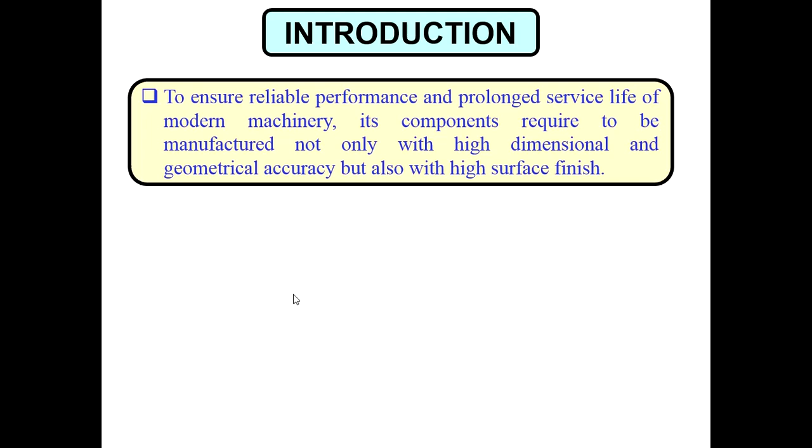In normal machining operation, no doubt dimensional accuracy of the component is important, but along with that geometrical accuracy and high surface finish is also important. This high surface finish along with dimensional and geometrical accuracy ensures the prolonged service life for the component and reliable performance. Premature failure of the component in service life will be avoided if you have good surface finish for the component.

This surface finish plays a very important role to improve properties such as wear resistance, fatigue strength, corrosion resistance, and power loss due to friction. All these enhance the service life of the component. These are very important properties when the component is actually working.

We have some methods like turning, milling. These methods are not able to meet the requirement of surface finish as per the application. Even grinding, which is considered one of the finishing operations, is not applicable for delicate workpieces for finishing due to the large number of cutting forces generated in grinding.

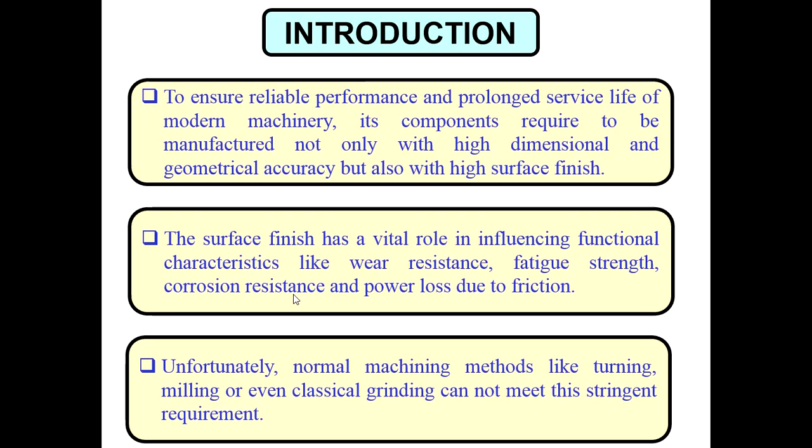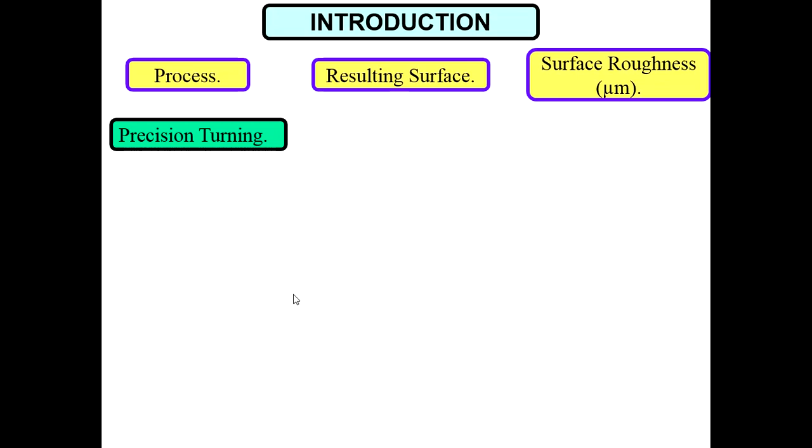Let's compare some finishing processes, the surface resulted from that, and the roughness value obtained. Roughness value is the measure of surface finish, measured with the help of a surface roughness tester. In precision turning operation, which is also considered a finishing operation in industry, we get a roughness value between 1.25 to 12.5 micrometer.

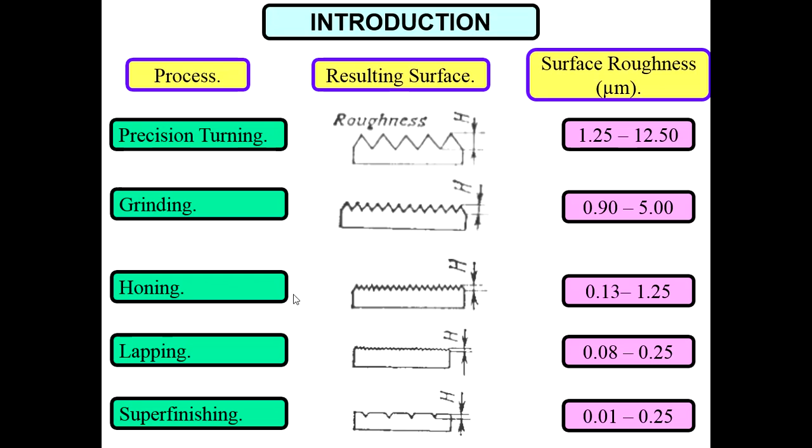In grinding we get roughness value between 0.9 to 5 micrometer. In honing, a finishing operation, we get roughness value from 0.13 to 1.25 micrometer. In lapping we get roughness value between 0.08 to 0.25 micrometer. Super finishing is a modification of the honing process, and it gives a roughness value between 0.01 to 0.25 micrometer.

Now let's consider lapping. Lapping is regarded as one of the oldest methods of obtaining a fine finish on the workpiece. It is basically an abrasive process in which loose abrasives function as cutting points, finding momentary support from the lap. These loose abrasives are used between the lap and the workpiece, with a vehicle material, some liquid material, used to carry these abrasive particles between the workpiece and the lap.

This lap is made from soft material. The relative motion between the lap and the workpiece should change continuously so that the path of the abrasive grains of the lap is not repeated on the workpiece. This scheme of the lapping process shows how lapping is done. Pressure is applied from the top, either manually or by machine, and the lap is moving so that the same abrasive grains are not in contact with the workpiece again and again.

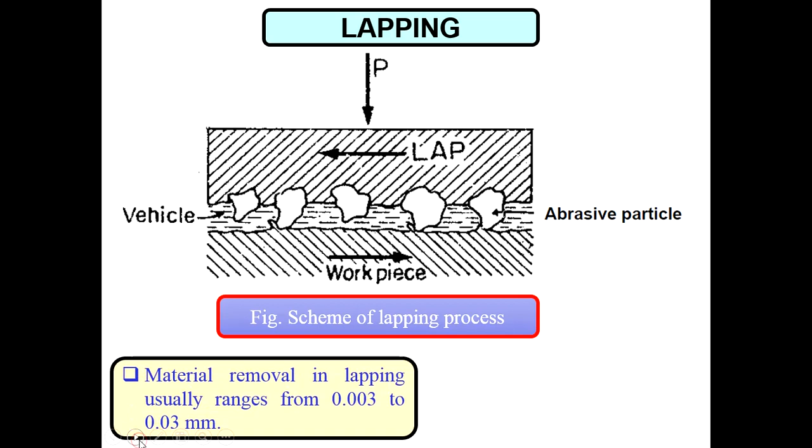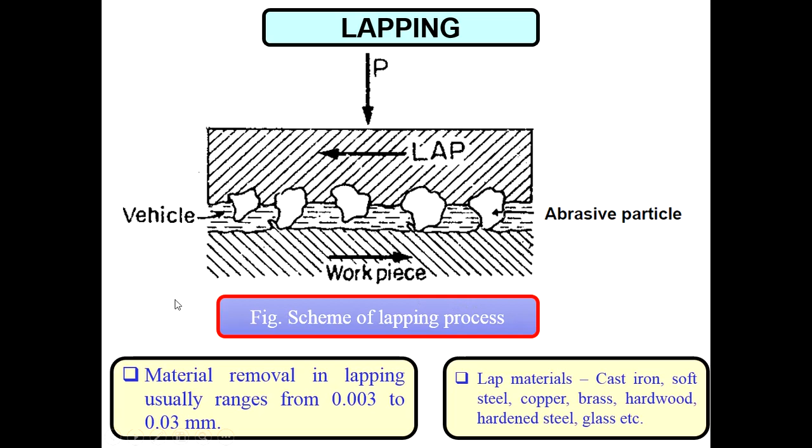Material removal in lapping is very small, 0.003 to 0.03 mm. We use some soft materials for manufacturing the lap, such as cast iron, soft steel, copper, brass, and some hardwood. Hardened steel and glass are also used as lap material for manufacturing the lap.

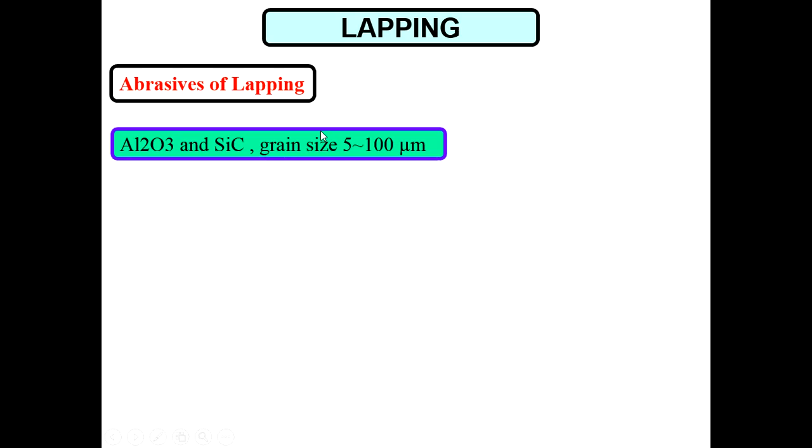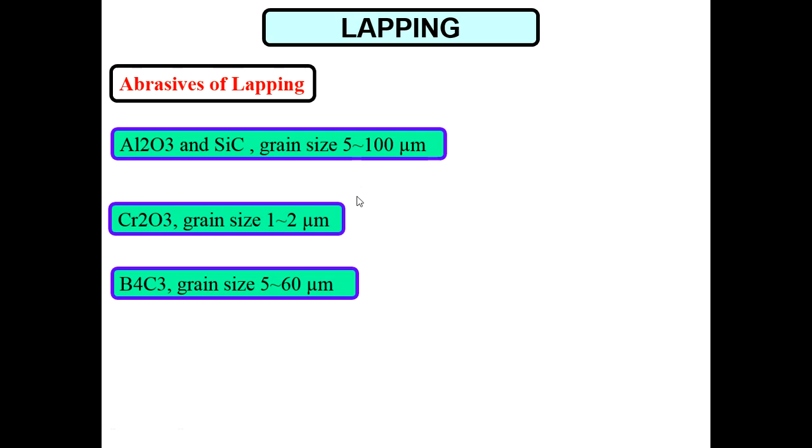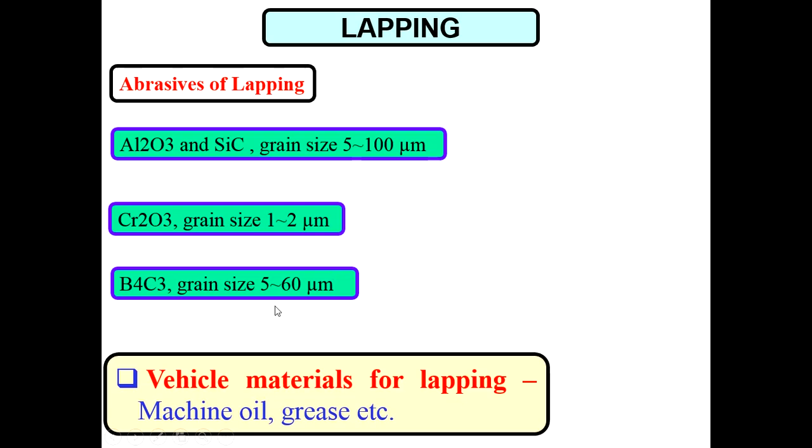Some abrasives used for lapping are aluminum oxide and silicon carbide, with grain size between 5 to 100 micrometer; chromium oxide, grain size between 1 to 2 micrometer; and boron carbide, grain size between 5 to 60 micrometer. The vehicle materials for lapping are machine oil and grease, which carry these abrasive particles between the lap and the workpiece.

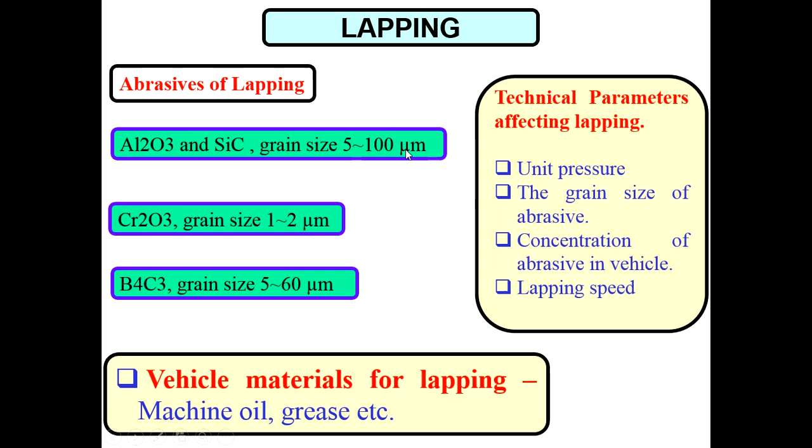These are some technical parameters in lapping: the pressure applied on the lap, and the grain size of the abrasive, which plays an important role in what grain size you are selecting. Then the concentration of abrasive in the vehicle, how much abrasive is present, also plays an important role. Then lapping speed, the speed at which you are moving the lap over the workpiece or the workpiece is moved relative to the lap, is also an important technical parameter in the lapping process.

Now we have two types of lapping: first is hand lapping and second is machine lapping. Hand lapping is done with abrasive powder as the lapping medium, whereas machine lapping is done with either abrasive powder or with a bonded abrasive wheel, considered as a lapping wheel. Both are used in machine lapping, either loose abrasive powder or bonded lapping wheel.

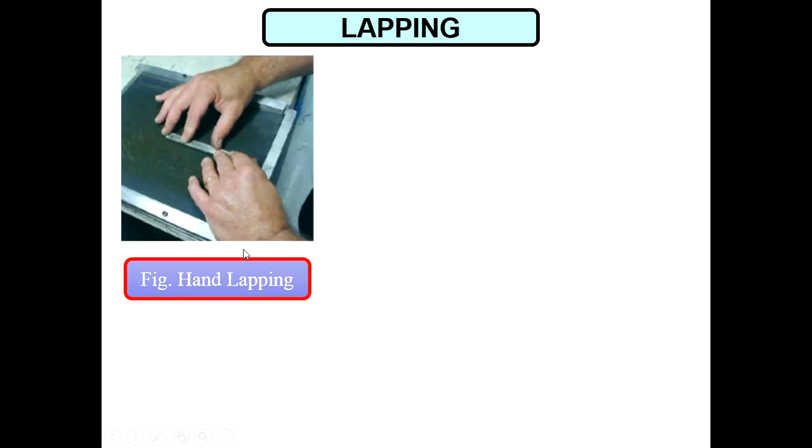The hand lapping of a flat surface is carried out by rubbing the component over some accurately finished flat surface of a master lap, usually made up of a cast iron block. Manual lapping requires high precision skill because the lapping pressure and speed should be controlled manually, requiring a skilled operator. The vehicle material is spread over the lap, and the material to be lapped is moved manually over the lap. The speed and pressure are both controlled manually, requiring a skilled operator for hand lapping.

And then we have some machine lapping also.

Machine lapping is an economic way of lapping for batch quantities only. If you have to lap for one or two components, this may not be economical, but for batch quantities, we can prefer machine lapping.

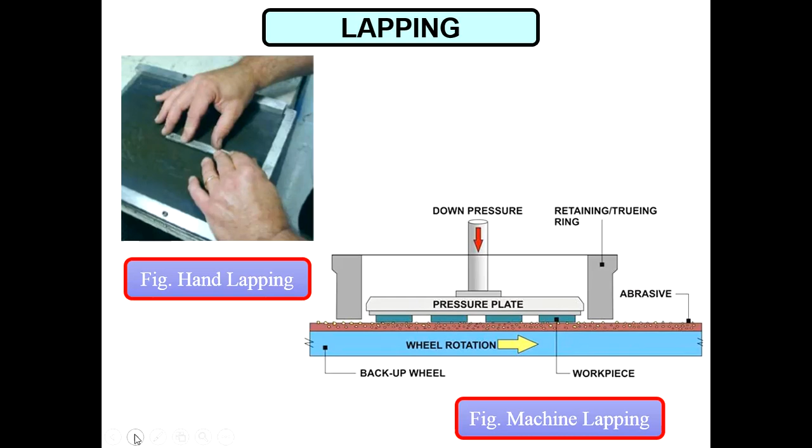This machine lapping uses laps as well as abrasive powder, which are held in a suitable vehicle medium for lapping. Machine lapping is also a very popular method nowadays in industry to achieve the required surface finish on the workpiece. Then we have honing.

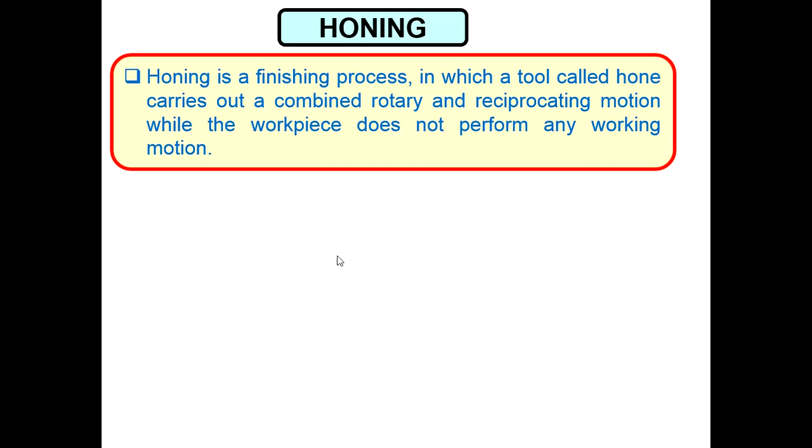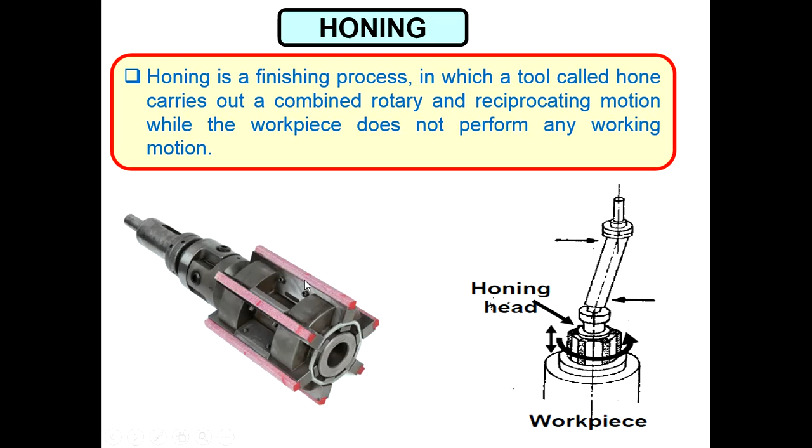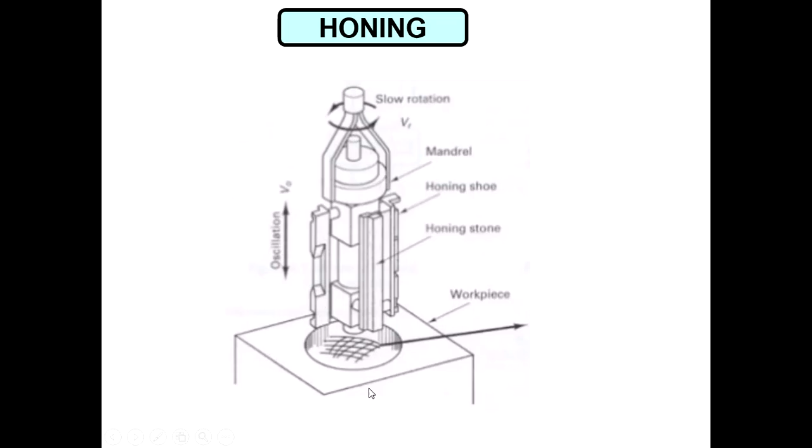Basically the finishing is done by these abrasive blades mounted along the periphery of the honing tool. This is a different part of the honing tool. Rotary motion as well as oscillations are given to the honing tool. So we have the workpiece, these are the honing stones, a mandrel is there, and this tool is moving inside the workpiece.

Some critical process parameters for honing are the rotational speed of the tool, oscillation speed, and length and position of the stroke. Length of the stroke is generally equal to the length of the workpiece. Then honing stick pressure is also important, how much stick pressure we are having.

This stick pressure is basically obtained by the springs. When the honing stone comes in contact with the workpiece, this spring gets pressed, and because of this the pressure is applied by the honing stone over the workpiece, resulting in finishing as the tool rotates and is given some oscillation motion.

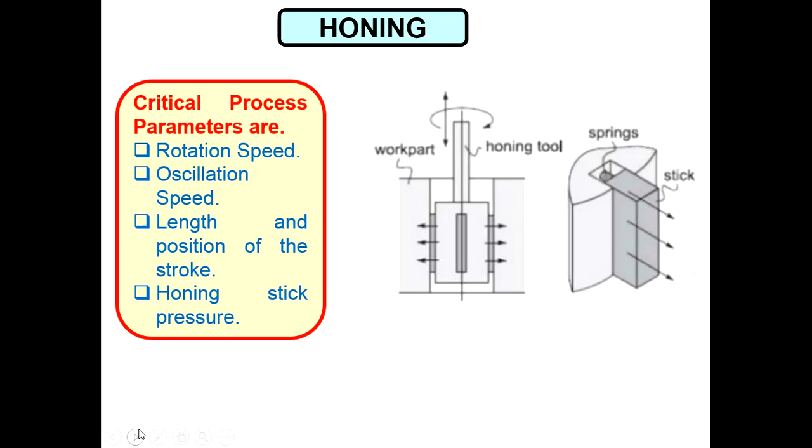These honing stones are held against the workpiece by spring pressure with the help of the controlled light pressure we are using, and honing is always supported with the help of some coolants. These coolants will remove the heat of finishing, but also remove some small chips, and a uniform temperature will be maintained between the tool and the workpiece.

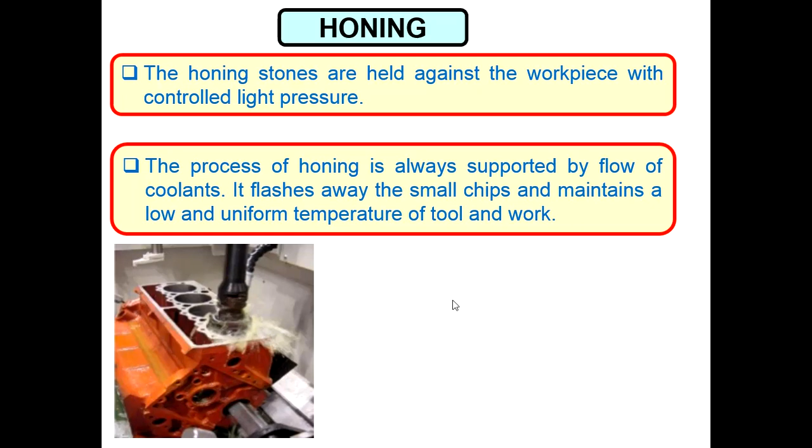Then we have the super finishing process. Super finishing is an alternative process, similar to honing. This also uses a bonded abrasive stone or stick, as you can see here. This is moved with a reciprocating motion and is pressed against the surface to be finished. The workpiece is rotating, and this reciprocating motion is given to the bonded abrasive stone.

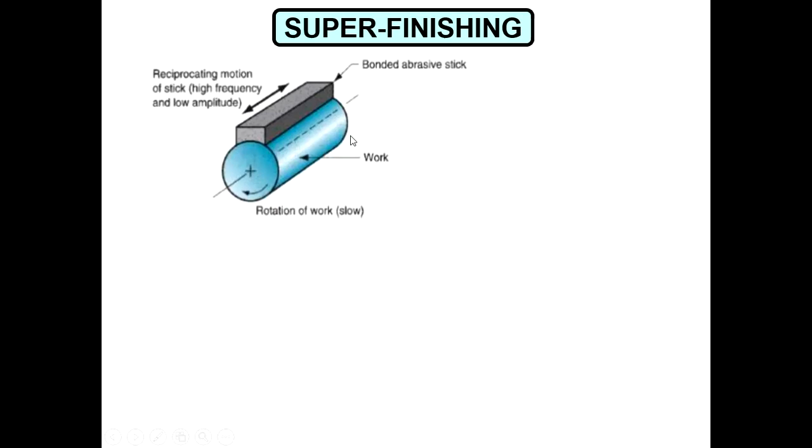Cutting fluid is used in this process for cooling of the tool and work interface. This cutting fluid also washes away the tiny chips in the process. So a high amount of surface finish is obtained because of this process, which is not obtainable by other surface finishing processes.

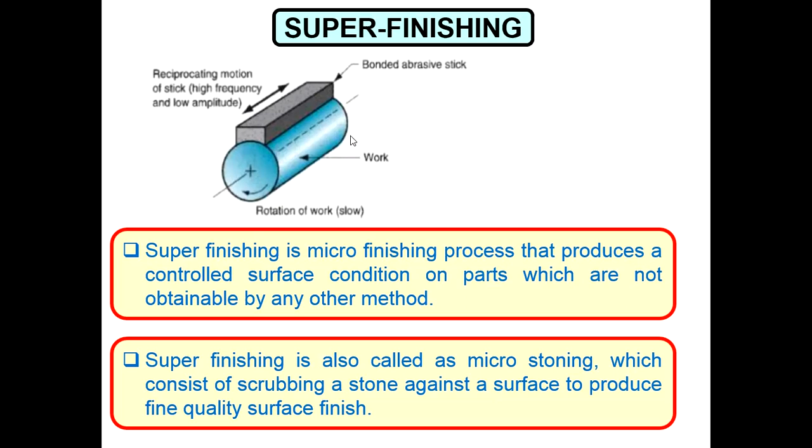So we are using a microstone. A fine abrasive powder is used for manufacturing of this stone. This stone is rubbed against the workpiece surface to produce the required quality surface finish.

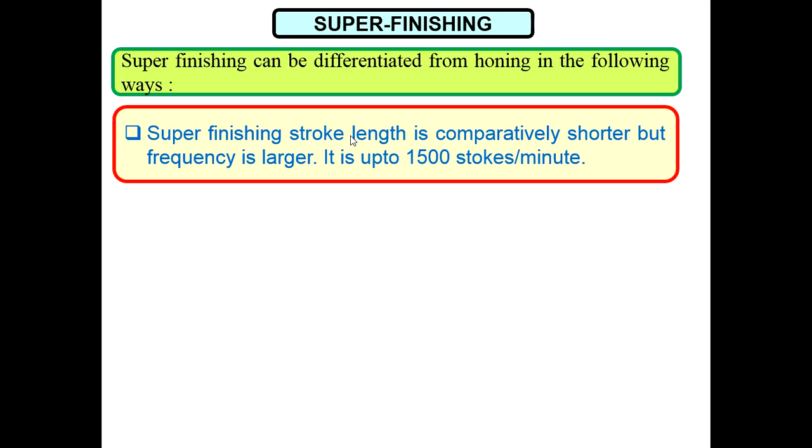Now if you compare super finishing with the honing process, what is the difference between the two? The stroke length is comparatively shorter, up to 1500 strokes per minute, and the pressure is low as compared to the honing process.

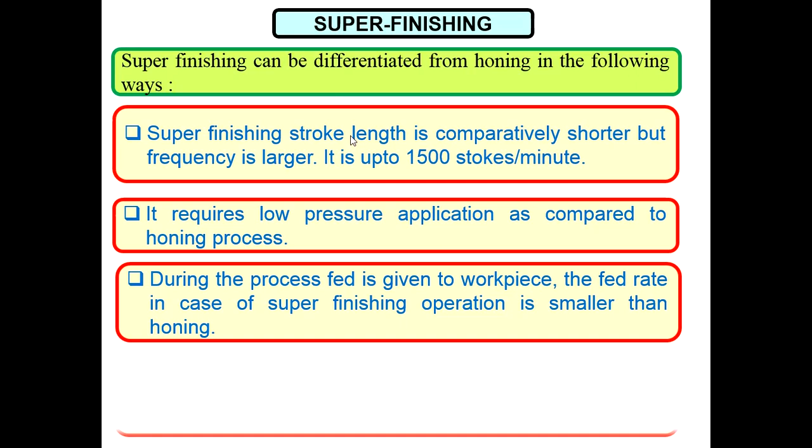In this case, the feed is given to the workpiece. The feed rate in super finishing is also very small as compared to honing, so it is a very slow process. The grit size or particle size used in super finishing is very small compared to honing, so because of this fine grain size, we get a high surface finish on the workpiece.

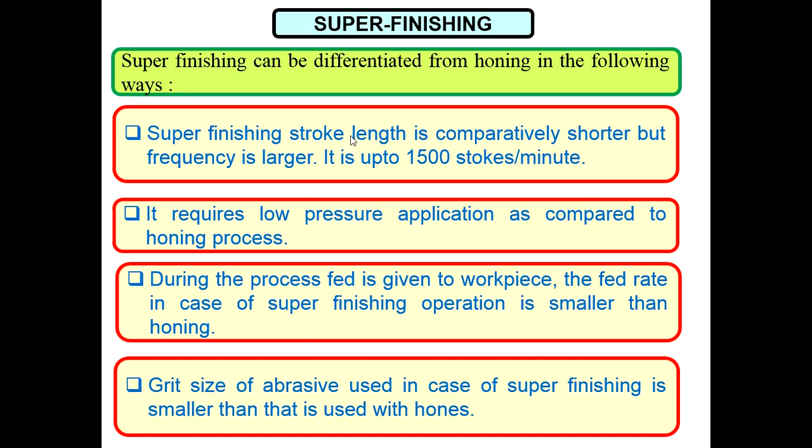So these are the different types of super finishing processes and their importance, which we have studied: honing, lapping, and super finishing. Grinding is also a super finishing process, but because of its limitations, we cannot finish all different workpieces, like complex geometry or delicate workpieces. So you have to move to lapping, honing, or super finishing to get the required surface finish on the workpiece. Thank you.